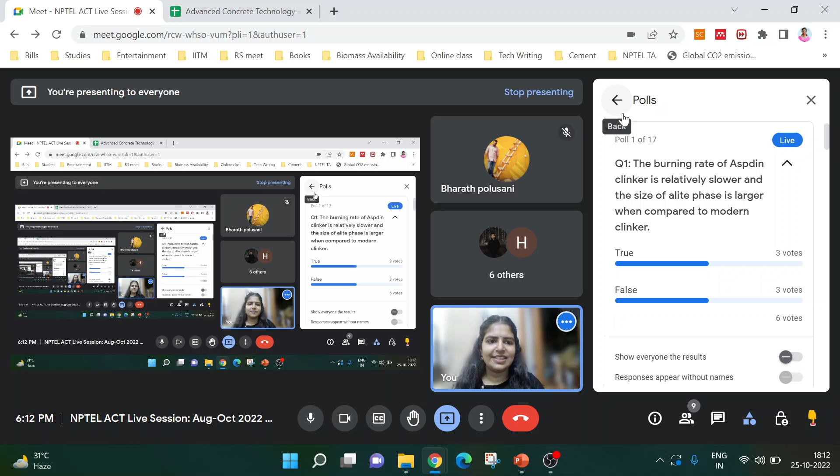I thank you guys, and brush up the basics. I request everyone to go back to the initial lectures and please watch the videos or go through your notes, because I'll get questions from all the parts, not only from the recent part. Okay, so the correct answer is

The correct answer is true, because the burning rate of Aspdin clinker is relatively slower. That's why the crystals of alite are comparatively larger, and then the size of belite is... So the burning rate will be comparatively slower compared to the modern clinker. And in Aspdin clinkers, the kiln used is a vertical kiln, and in modern clinker, the kiln used is a rotary kiln.

So in Aspdin clinker, the kiln is going to be a vertical kiln, so the loading of material is not a continuous process. But in modern cement plants, there is a rotary kiln where the loading and unloading will be continuous. The materials will be loaded from one part of the rotary kiln, and then the output will be continuous.

And the burning rate will be relatively slower in Aspdin clinker when compared to modern clinker. The size of the alite phase will be larger and the belite is smaller. In modern clinker, the alite size will be very small compared to the Aspdin clinker. That's why the reactivity is higher.

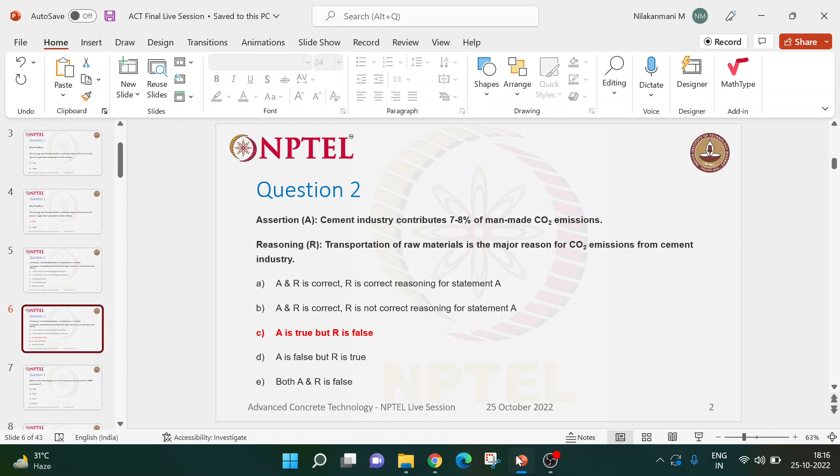Okay, most of you have picked option B. You might think that transportation is the major reason, but it's not the major reason. It's one of the reasons, but it's not the major reason that contributes to carbon dioxide emission. Let's see the polls as well.

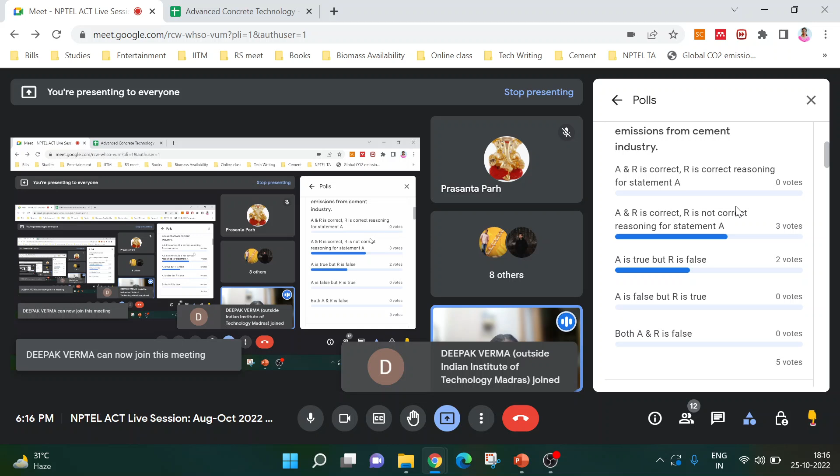Okay, some people have thought that R is not a correct reasoning. We cannot say R is not a correct reasoning because transportation also contributes, but it's not the major contributor. That's it. Okay, now let's get back to the PPT. So now let's move to the next question.

So here the question is, which of the following phases is found first in the rotary kiln in OPC production? Okay, so let me start a timer for 30 seconds. Please give your answer in polls as well as chat box. Try to give your answer in polls because I'll get a collective response on whether you understood the topic or not. If not possible, please give your answer in chat box.

So we all know that C3S, C2S, C3A, C4AF, all these phases are found. But which phase is found first in the rotary kiln? Time is up. Okay, let's see the correct answer. The correct answer is C2S. Around 1200 degrees Celsius itself, C2S is formed. Then some of the C2S will be recombining with the calcium oxide there to form tricalcium silicate. But at 1200 degrees Celsius itself, C2S is formed.

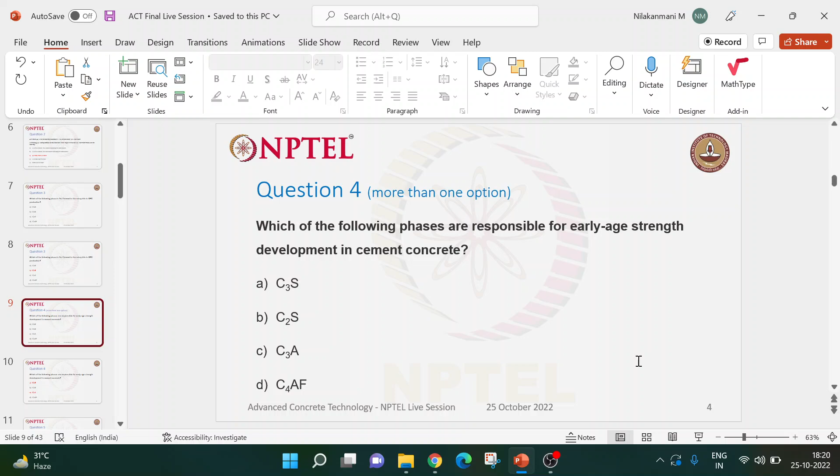Most have given the right answer for the question. It's nice. Let's get back to the PPT. The correct answer is option C and option C.

We all know that C3A, tricalcium aluminate, reacts very fast compared to the other phases, and C3S is responsible for the earliest strength development. C3A is also responsible for the earliest strength development because of its fast reactivity, so that's one reason it contributes to earliest strength development as well, not only C3S. And we all know that C2S is responsible for the later age strength development.

Now let's move to question number 5. The question is, high reactivity of C3S is due to irregular crystal structure of C3S, which depends on what. You have to find the reason. Let me start the timer for 30 seconds now.

Let's see the answer. You have to find which is the correct reason for the irregular crystal structure of C3S here.

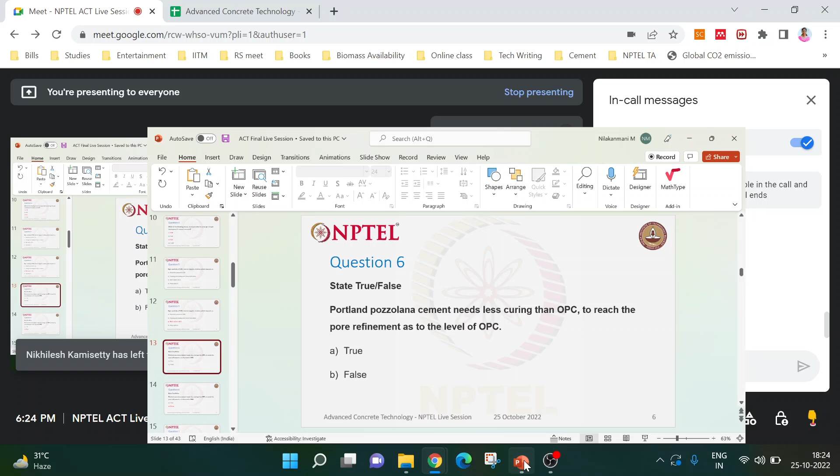Time is up. Let's see the class response. Most of them picked false as the right answer, because we all know that it requires more curing. That's nice.

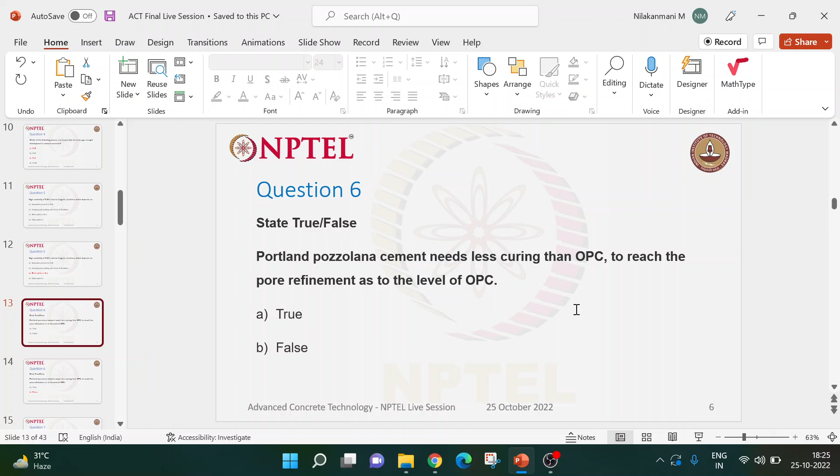Now let's get back to the PPT. The correct answer is false, because Portland pozzolana cement needs more curing than OPC. We all know that from ordinary Portland cement hydration, Portlandite will be produced, and that Portlandite will react with the reactive silica from the pozzolanic material, so it requires more time for the additional CSH to form.

Now let's move to question number 7. The C3S and C2S phases react with water to form CSH gel and calcium hydroxide phases. So the outer CSH is formed by which process - dissolution or water diffusion - and the inner CSH is formed by dissolution or water diffusion? Which is the right answer?

If you're picking option A, it says that outer CSH is formed by dissolution and inner CSH is formed by water diffusion. If you pick option B, it says that outer CSH is formed by water diffusion and inner CSH is formed by dissolution. Let me start the timer for 30 seconds.

All these questions are launched in polls. Time is up. Let's see the class response. Most of you picked the right answer.

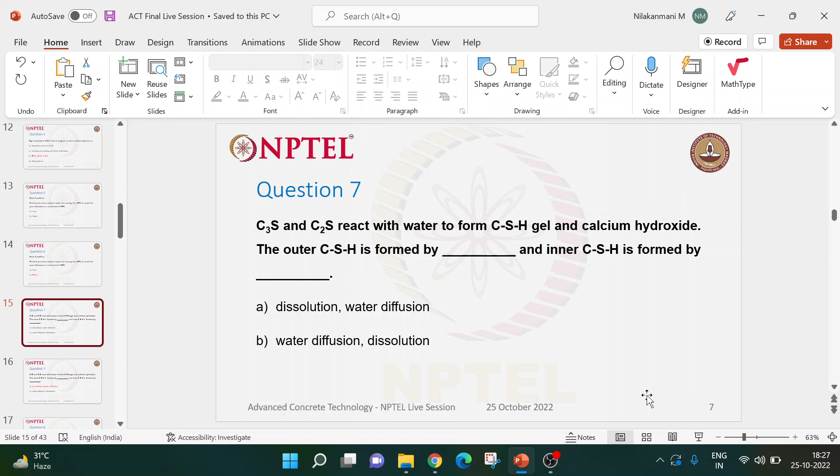The right answer is option A. Outer CSH means it's formed on the outer region of the unhydrated cement grain. Initially the cement grains try to dissolve into the water, then it converts water to pore solution because it now contains ions. So the outer CSH will be on the outside of the cement grain - it undergoes dissolution, forms the outer CSH. Coming to inner CSH, the water should break the barrier formed by the hydrates around the cement grain and diffuse inward, so inward water diffusion happens, then inner CSH will be formed.

We all know that outer CSH is more porous because it undergoes dissolution from the reaction products. When we see inner CSH, it is more dense because water gets into the unhydrated cement grain and then reacts to form inner CSH, and comparatively inner CSH is denser.

Now let's move to question number 8. Aluminates, which is tricalcium aluminate and tetracalcium alumino ferrite, in the absence of dash hydrate rapidly to produce calcium aluminate hydrate, which causes flash set. So what do we add - in the absence of that particular ingredient, aluminates hydrate rapidly. You have to give the right answer. Let me start the timer for 30 seconds.

We also call it a set controlling agent. It's a very simple question.

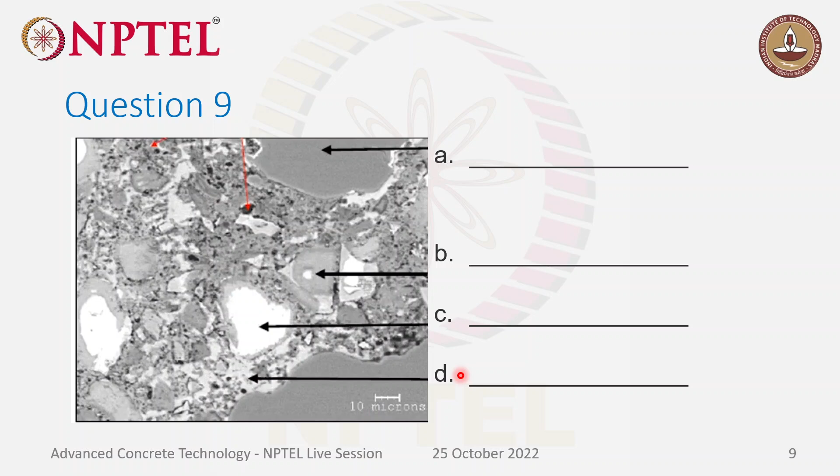Okay, let's see the solution anyway, and then see the class response. So the first part doesn't have any gradients, which means it's a sand particle. It does not have any gradation and it's larger in size also.

Coming to option B, B is nothing but CSH, because the outer part is hydrated and the inner part still remains as unhydrated cement grain. Unhydrated cement grain appears to be very bright in the backscatter electron image compared to CSH. And Portlandite also appears in bright phases, but since it's mixed with the ground mass, it will have both phases, so it will be mixed with the gray phases, but it will be a bright spot.

So Portlandite will be present mostly in between the space between the aggregate and the cement phase. The interfacial transition zone is the place where Portlandite will be present because it has more space for the Portlandite crystal to grow.

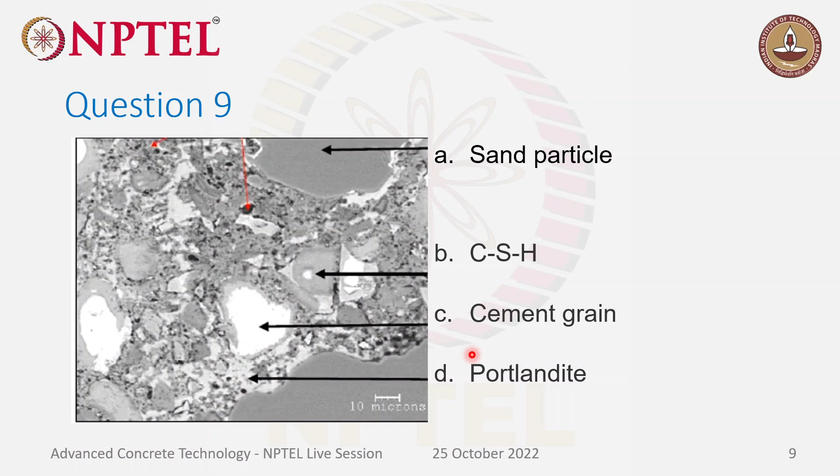Okay, so now let's move to the next question, again going back to our first question. So here the statement is: the water present in capillary pores is classified as free water, and the removal of that water does not cause any shrinkage strain.

Okay, so let me start the timer for 30 seconds. Can we say all the water present in the capillary pore is free water? And then does the removal of that free water not cause any shrinkage strain?

See the solution. The correct answer is false. Some of you think it is true. No—the water present in the very fine capillary pores is different.

So the water present in the capillary pores is classified into two types: one is free water, one is water by capillary suction. The very small capillary pores have water under suction, capillary tension will be there, so the removal of water from very small pores will cause shrinkage strain. The water present in the larger capillary pores will not cause any shrinkage strain, which is classified as free water. But the water present in the very small capillary pores is termed as water under capillary suction, which does cause some shrinkage strain.

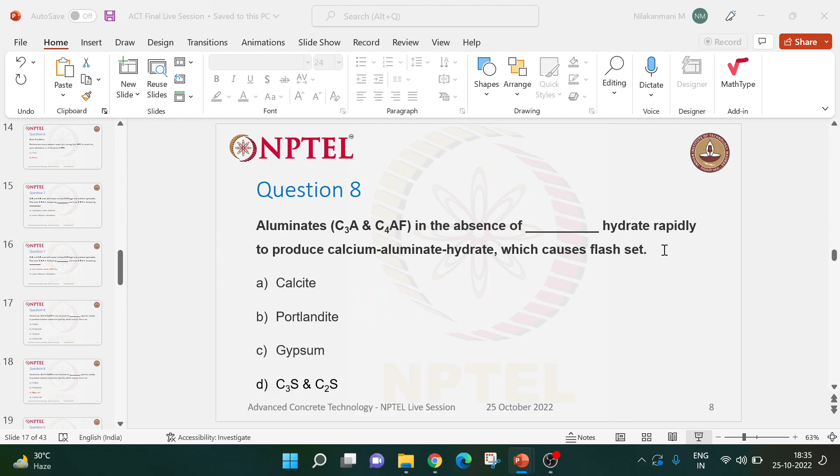So the answer is false. The removal of free water does not cause any shrinkage strain, but all the water in capillary pores cannot be classified as free water. Let's see the class response.

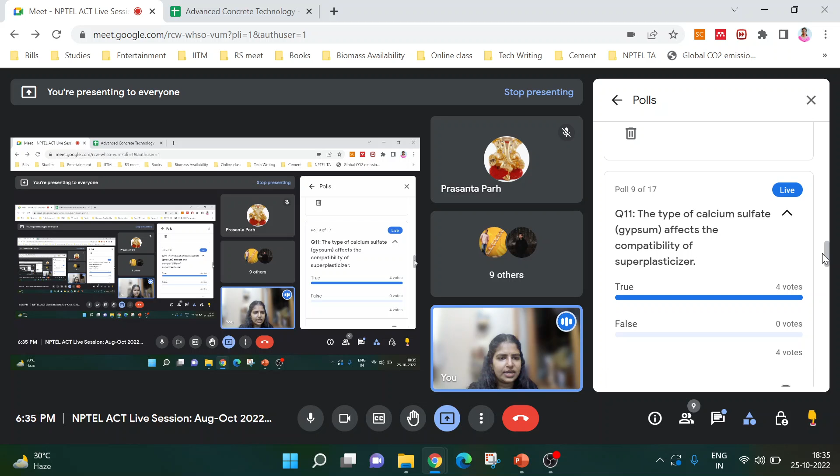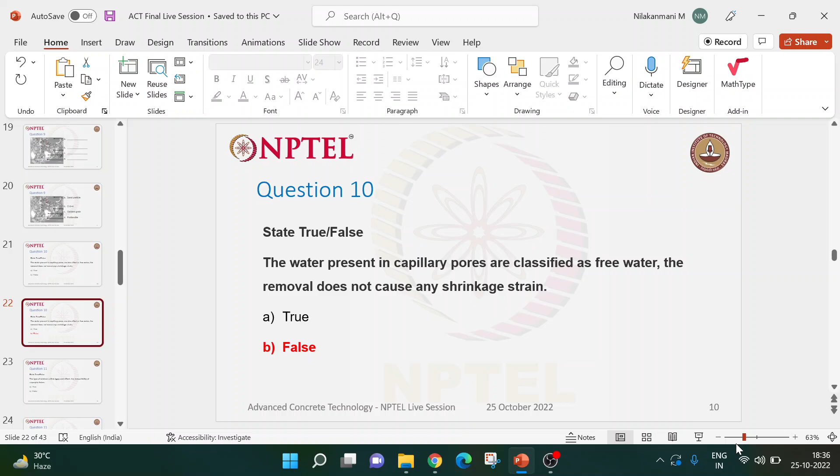Okay, most of you thought both aggregate and sand are same. Okay, fine, that's a good attempt. Most people thought that it's true, but it's not. It's partially true, but even if it's partially true, it's false.

Next is question 11. The type of calcium sulfate gypsum affects the compatibility of superplasticizer. Is that true? Let me start the timer for 30 seconds. Normally we use calcium sulfate gypsum as a controlling agent, so the type of calcium sulfate will affect the compatibility of superplasticizer.

The answer is true, because both calcium sulfate and superplasticizer contain sulfate-related groups - calcium sulfate has sulfate in it, and superplasticizer has sulfonates in it. Both of these sulfates and sulfonates will concentrate on the alumina sites from calcium aluminate. During that time, there will be conflict between the calcium sulfate from the gypsum and the sulfonates from the superplasticizers. So we have to consider the type of calcium sulfate we are using, and how we can reduce the compatibility issues between the superplasticizer and the gypsum type.

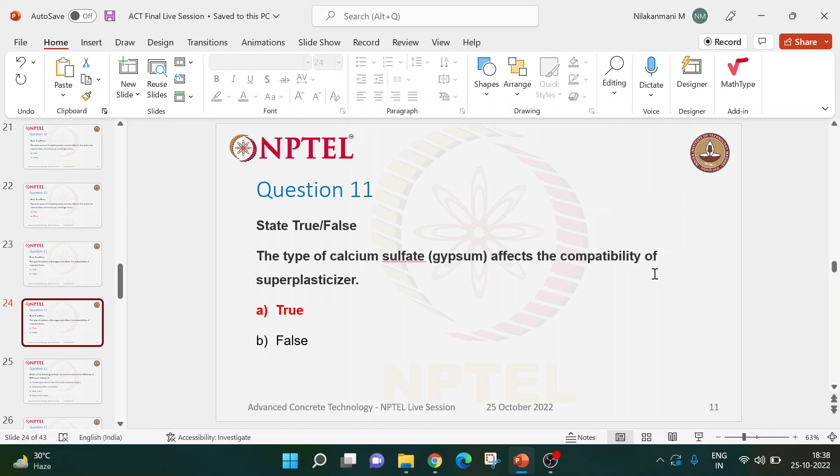Next question: which of the following methods are used to increase the efficiency of SNF based water reducers? We know that there are different types of water reducers, and SNF is one among them - it's a second generation water reducer. So they're asking which of the following methods can be used to increase the efficiency of SNF, sulfonated naphthalene formaldehyde water reducers.

Let me start the timer now for 30 seconds. There are different options here: reducing the dimers and trimers, which are low molecular weight SNFs, and maintaining the sulfate at the beta position. Option C is both A and B, and option D is none of them. Please pick the right answer.

Time is up, let's see the solution. The correct answer is option C - we have to reduce both the dimers and trimers, which are low molecular weight SNFs that need to be removed. Centrifuging is one of the processes by which we can remove the lightweight particles out. Maintaining the sulfate in the beta position increases the efficiency as well as decreases the compatibility issues.

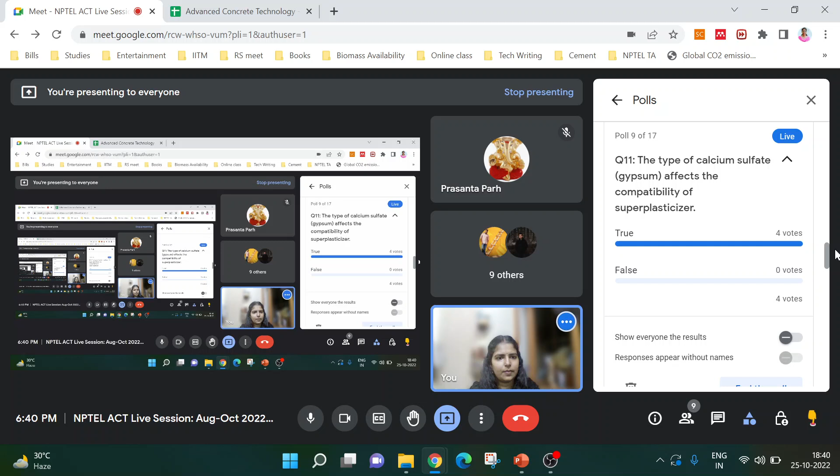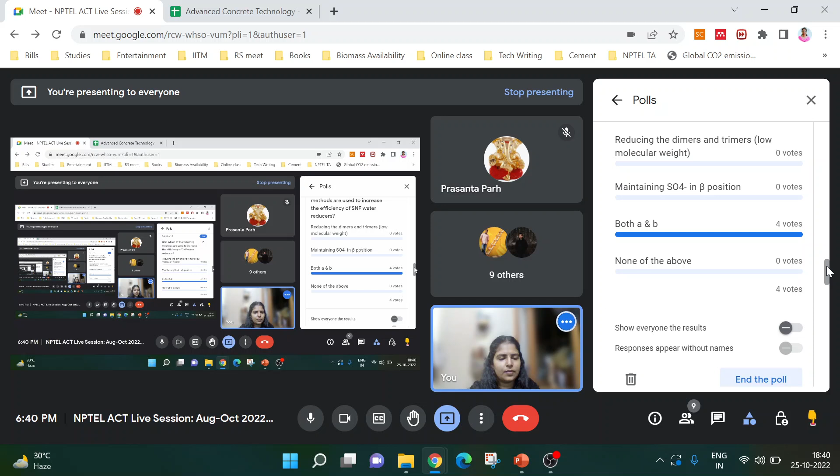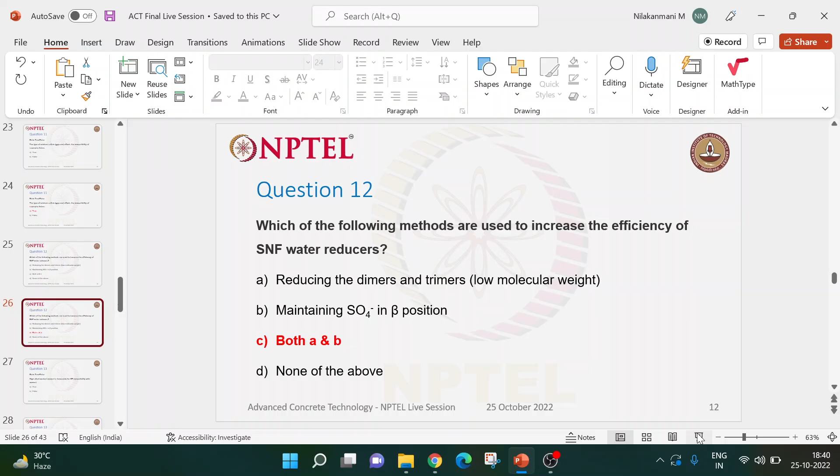Now let's get back to the next question, question number 13. It says that high alkali content cement is favorable for SP compatibility with cement. SP is nothing but superplasticizer. Is high alkali content cement favorable for superplasticizer compatibility with the cement? Let me start the timer for 30 seconds now.

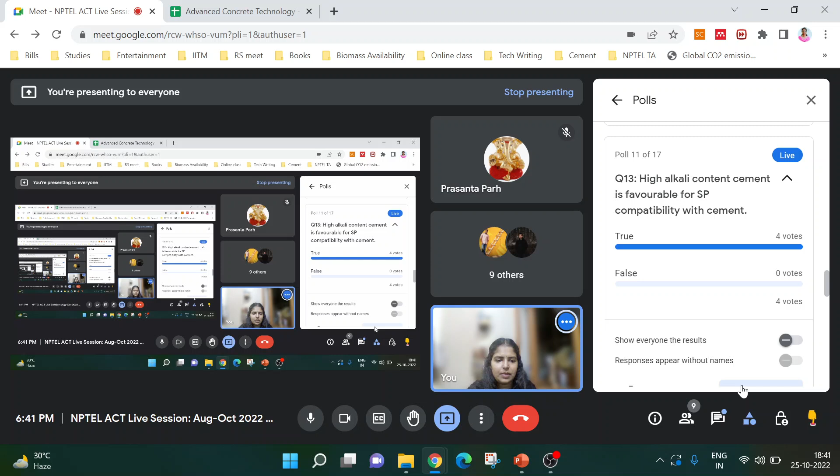Is high alkali cement content favorable for workability and SP compatibility? Is that so? Let's see the class response. Most of you picked true, but some people have picked false as well. Let's see what's the right answer.

The correct answer is false. It's not true, because high alkali content will affect the workability. Normally even high alkali cement is not favorable for workability, so it also affects the SP compatibility with cement. One of the techniques to reduce the compatibility issues is to reduce the alkali content, and also reduce the fineness - fineness is related to reactivity. Increasing the fineness will increase the reactivity, but increasing the fineness is not always favorable. We have to moderate the fineness of cement such that there is no compatibility issue between the SPs and the cement, because high fineness leads to absorbing more SPs.

If it absorbs more SPs than required due to fineness, then obviously we can get the workability, but in the end it will cause retardation as well. So we have to think about different elements when it comes to workability.

Now let's move to question number 14. It says that second generation high range water reducers, which is nothing but sulfonated naphthalene formaldehyde or sulfonated melamine formaldehyde, requires a minimum of 25 to 50 mm slump for suitably acting on the cement paste. Let me start the timer.

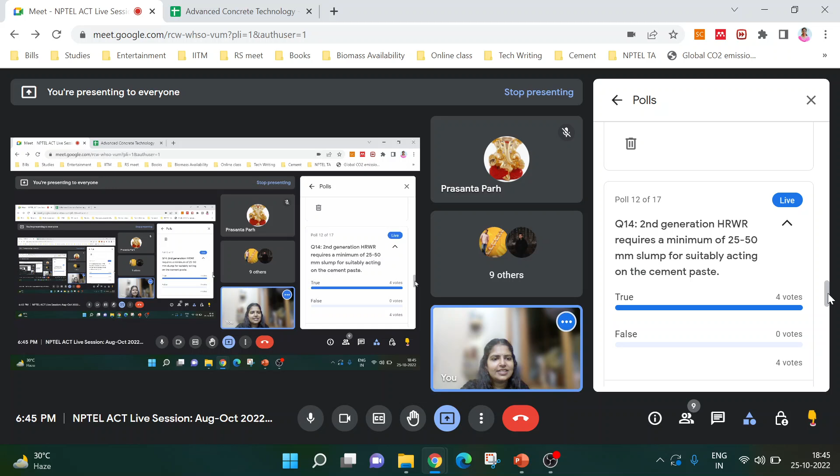Going to question number 15. Question number 15 says that shrinkage reducing admixtures work by increasing the surface tension of the liquid in pores. Pores are nothing but the capillary pores and fine gel pores in the cement concrete. Okay, so saying that shrinkage reducing admixtures function by increasing the surface tension of the liquids. Okay, let me start the timer for 30 seconds. Please give your right answer.

Okay, now how do shrinkage reducing admixtures work? You know the answer. Let's see the solution, then we'll see the class response. The correct answer is false. Because shrinkage reducing admixtures work by reducing the surface tension. So here know that a movement of water will be there inside cement concrete from hydrated phase to unhydrated phase. Okay, so like water will be mixed with cement, so cement starts to hydrate.

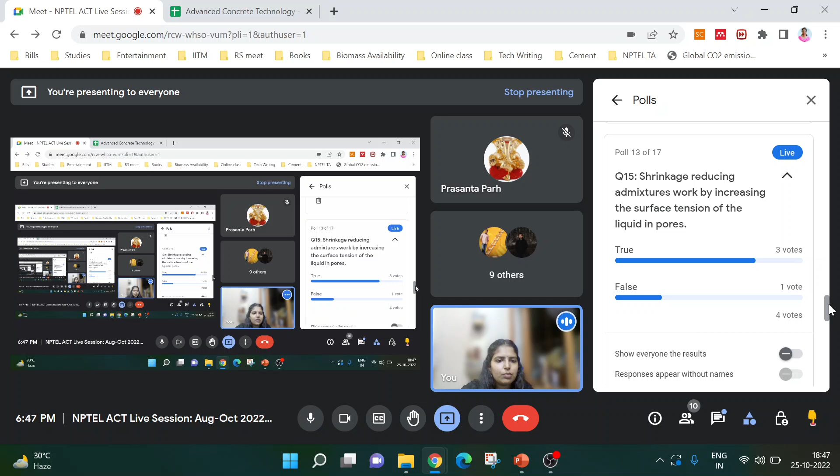Let's see the class response. Okay, many of you people have thought it's true. Okay, I hope you guys got it right now. I think there is some extra response here as well. Okay.

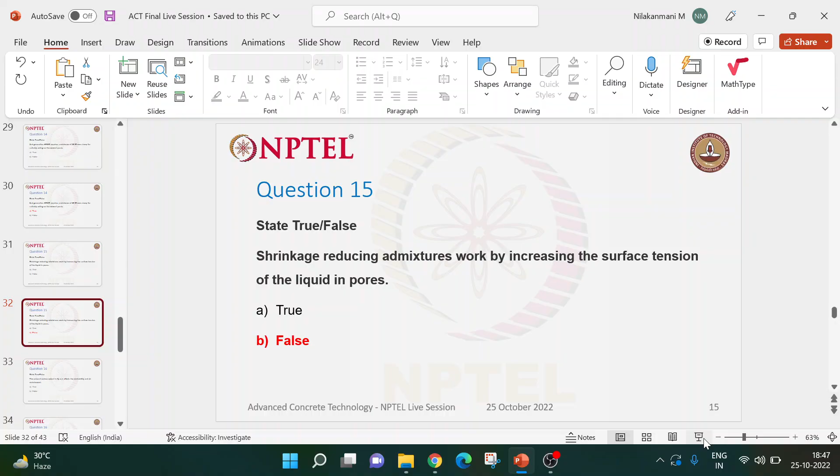Going to the next question. Here the statement is the unburned carbon content in fly ash affects the workability and air entrainment. Okay, so you all know that fly ash, when coal is burned in a thermal power plant, they get fly ash, and there will be some unburned carbon content left in the fly ash as well, which is measured with the help of loss on ignition test. Okay, loss on ignition values are related to the unburned carbon fraction in the fly ash. So the unburned carbon content in fly ash affects the workability and air entrainment. Is that so? Let me start the timer now for 30 seconds.

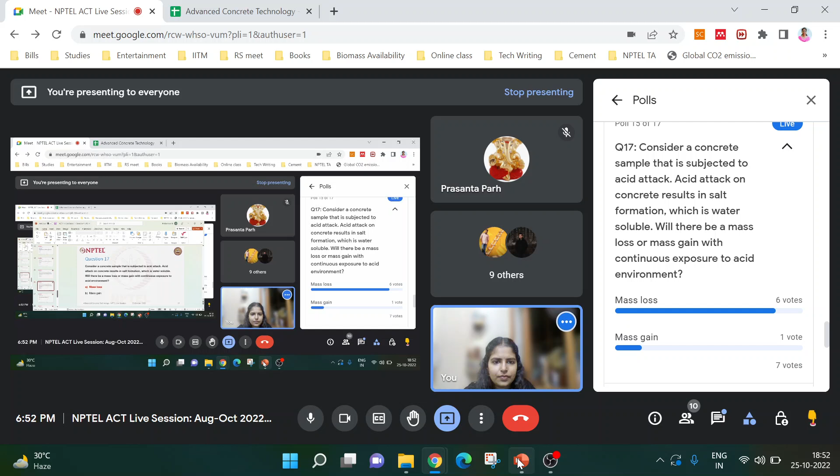Okay. So now let's see the class response. Okay, most of you have given the right answer. That's nice. Okay, let's see the next question.

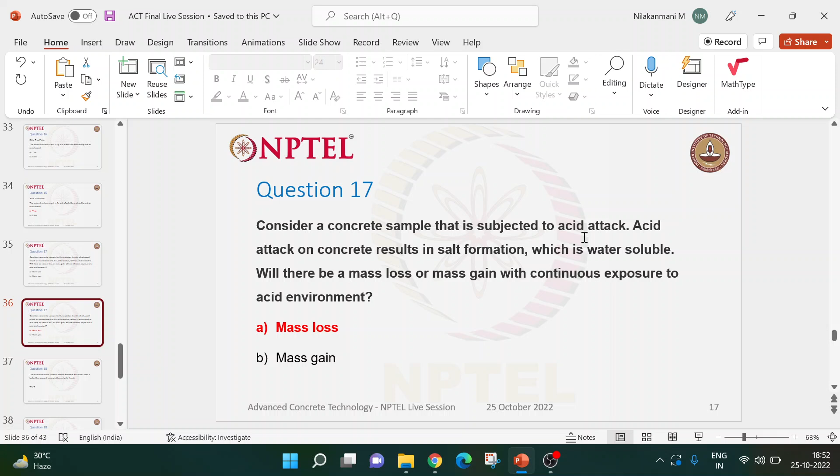Here's the next question; you have to type the answer in the chat box. The question is, the carbonation resistance of cement concrete with silica fume is better than cement concrete blended with fly ash. This is a statement which is discussed in the class as well. In the lecture, it is clearly explained. The carbonation resistance of cement concrete with silica fume is better than cement concrete blended with fly ash.

Why is it? Let me start the timer for 2 minutes. After 2 minutes, we'll see the solution. Please type your answers, or we will see after 1.5 minutes, okay? So please type your answer in the chat box. This question is not launched in polls, okay? So please give your answers.

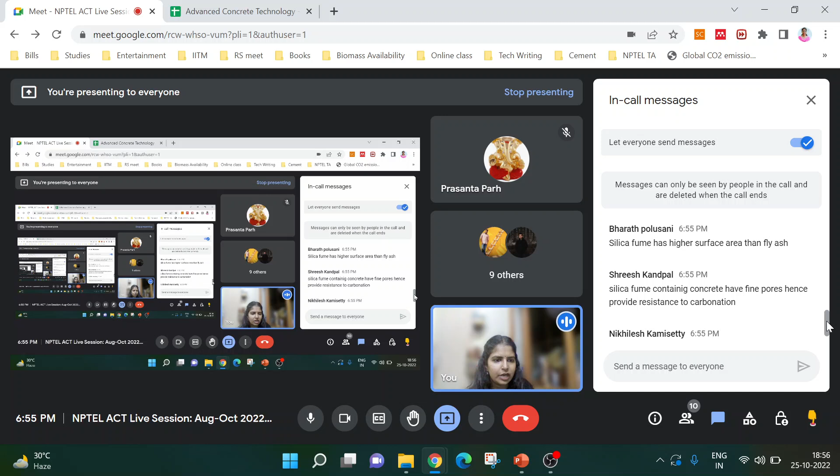Okay, maybe you're saying pore refinement. Pore refinement also because it's denser. Okay, so you're talking about the size, small and large. Silica fume containing concrete have fine pores which provide resistance to carbonation. Yeah, that can be one of the reasons. Dense particles will mix up with concrete with fly ash, but water penetration is not. Okay, there are some understandings, but there's more confusion in the class.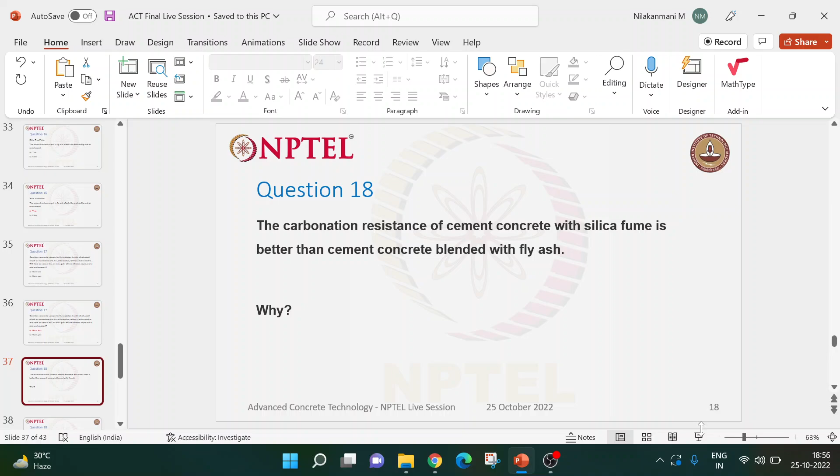Now let's see what are the reasons that can contribute to carbonation resistance of cement concrete with silica fume when compared to other blended systems. The typical replacement level of silica fume is limited to 5 to 15%, mostly 10% in most cases. Whereas with fly ash, the typical replacement levels are 25 to 30%. So more replacement leads to reduction in the Portlandite content available.

If more fly ash is replaced, then it will consume all the Portlandite, right? There will be no Portlandite available. We all know that the carbonation resistance of ordinary Portland cement is higher because of the availability of Portlandite. That Portlandite will react with carbon dioxide to form calcium carbonate, which helps the carbonation resistance of normal OPC cement concrete.

It forms a denser outer surrounding of the concrete, so it delays the further carbonation of the concrete. But in blended cement systems, we will not have Portlandite available, because the Portlandite will react with the reactive silica from the supplementary material to form additional CSH, so there will be no buffer available for carbon dioxide to react with.

So it will react with the existing CSH. The calcium from the CSH will react with carbon dioxide to form calcium carbonate, leaving the amorphous silica gel. That does not contribute to the strength, and it affects the concrete integrity as well.

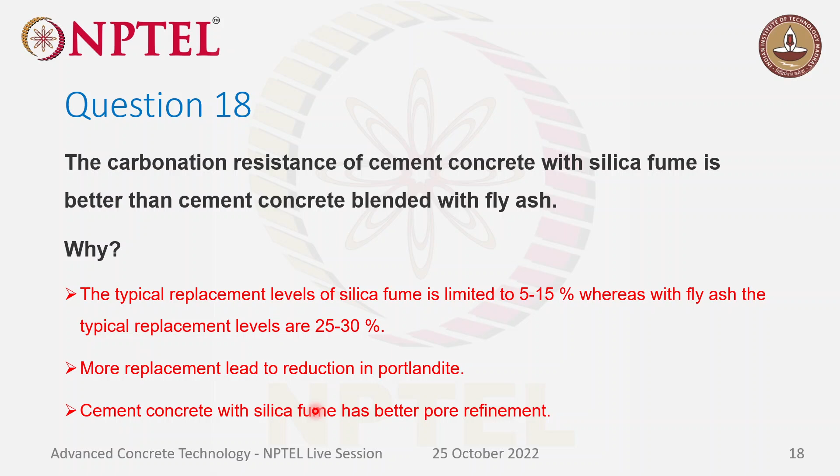And coming to pore refinement, cement concrete with silica fume has better pore refinement because it is a highly reactive pozzolanic material. So it leads to better pore refinement compared to fly ashes. So if the pore refinement is better, then it has better resistance to carbonation. Okay, so I hope you guys got it right.

Now let's move to the next question. Question number 19. Which of the following options will mitigate plastic shrinkage cracks in cement concrete? You have to find the correct answer. So please pick the right option here. Let me start the timer for 30 seconds.

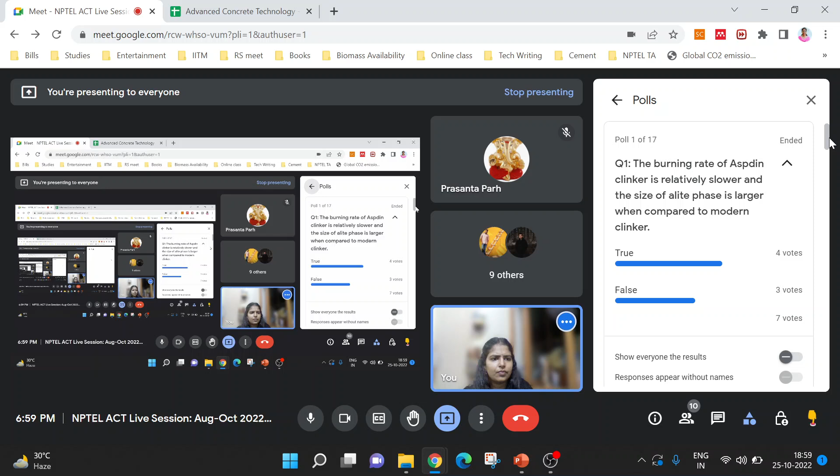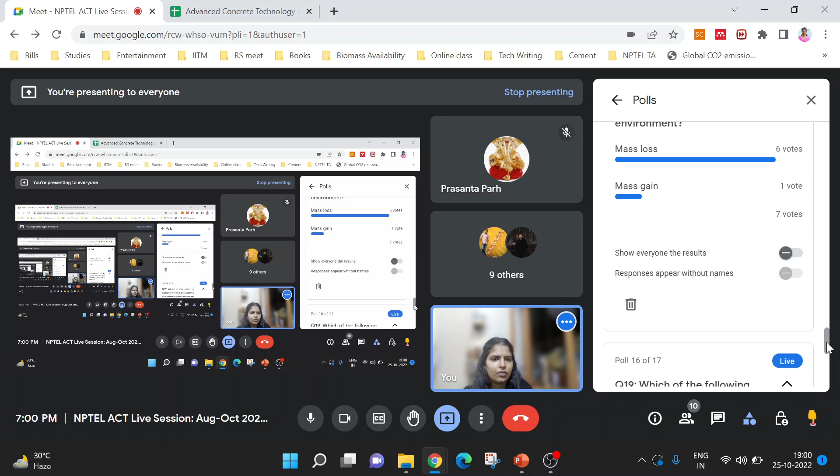Time's up. Let's see the class response and see the solution. Okay, most of you picked all of the above. Okay, let's see from the polls as well. Okay, this is a mixed response, but most of you have thought all of them. Okay, I don't know how come increasing water to cement ratio will really help. Okay, let me end the poll and let's see the solution.

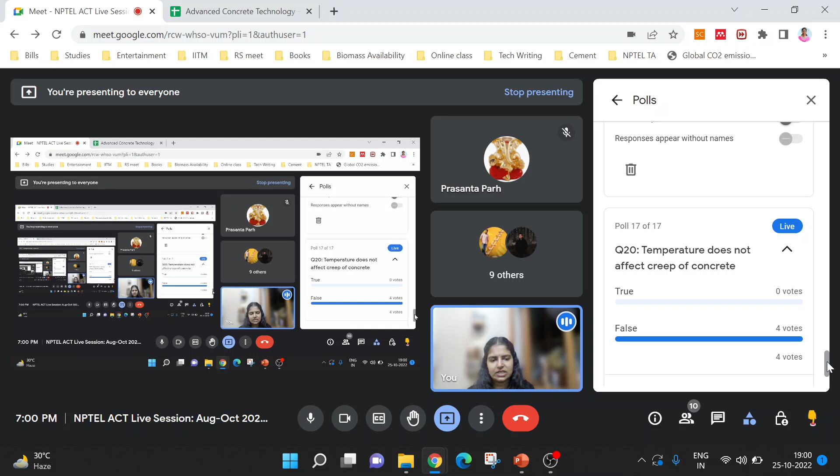So increasing the water to cement ratio does not help with plastic shrinkage. Okay, there will be more water available, and if more water is available, there will be more drying out, so there will be plastic shrinkage as well. Okay, now let's see the solution. The correct answer is both option B and C. Okay, so increasing the water to cement ratio will not help to mitigate plastic shrinkage cracks.

Addition of fibers to concrete. We all know that concrete is weak in tension. Okay, so shrinkage occurs when drying of water occurs while concrete is in plastic state, still green. So loss of water from the concrete leads to shrinkage. That is called plastic shrinkage. Okay, so adding fibers will add to the tensile strength of the concrete. So obviously, if there are some cracks happening, it will try to mitigate the cracks because of the addition of fibers.

And moving to option C, controlling the rate of evaporation of water from concrete surface. So obviously, plastic shrinkage cracks occur when there is a large surface area. Okay, if the concrete is very bulk and not much surface is exposed to the environment, then there is not much concern. We can consider a concrete bridge deck. Okay, then we can see more concrete surface is exposed. And if you consider a foundation type of structure, then not much concrete surface is exposed to the environment, right?

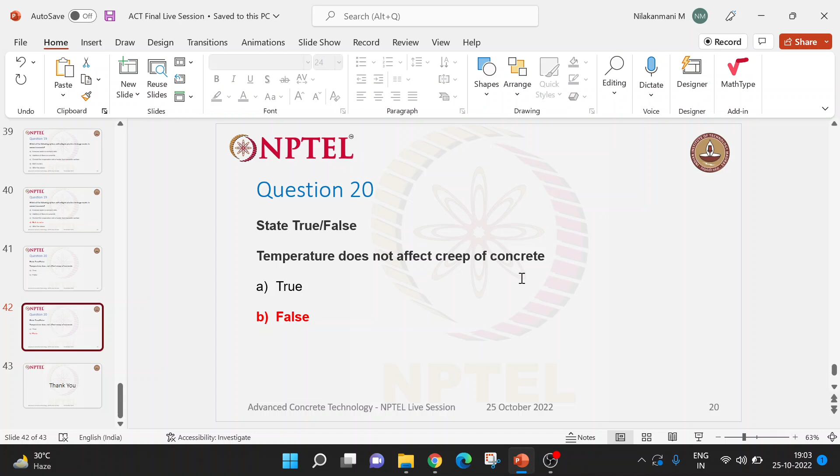Now let me stop sharing the screen because that was the last question. If you guys still have any doubt, we can discuss, or else the class is over. Okay, most of you gave the right answer.